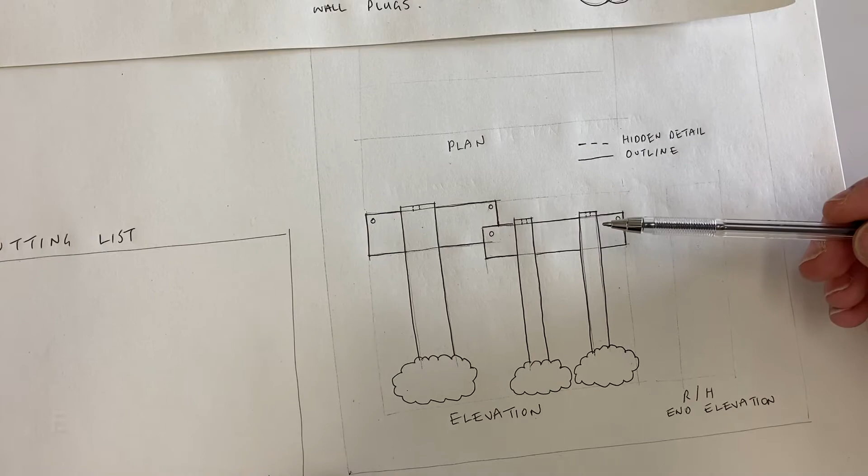You can see I've now finished sketching in my elevation. I've not added any dimensions yet, we'll do that at the end. But what I'm going to do now is I'm going to work on the plan view. So remember, the plan view is looking straight down the way from the top.

You can see that this piece of wood is thinner than this piece of wood, which is thicker. You can also see that I'll be looking at the holes on the top here, and I'll see just little skinny pieces or thin pieces of acrylic as I look from the top. That's going to be the trickiest part to do.

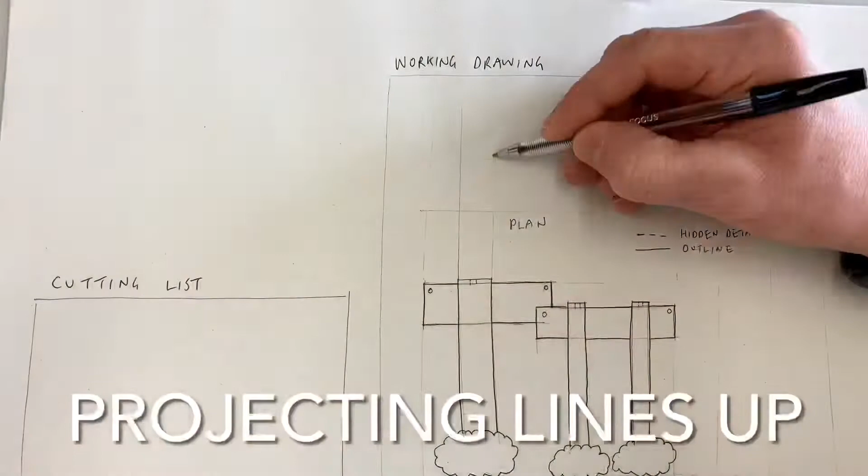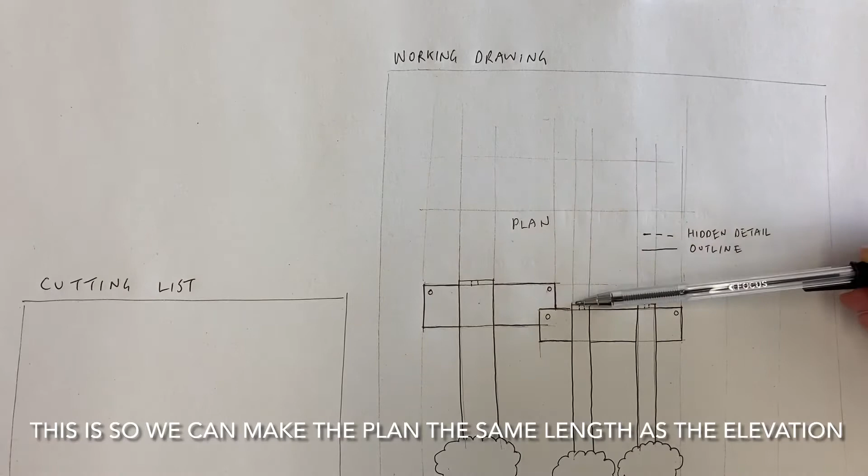You can see there that all I did was move from the left hand side to the right hand side of my elevation, and as I was doing that, when I came to any main feature, I have drawn a line up through where I want to put my plan, because I'm going to use these lines to help me arrange my plan to match up with the elevation below it.

The length of the plan should be exactly the same length as the elevation, and the width of each part on the elevation should be matched with the width on the plan. What I've done here is, using the width of my elevation, as I said before, I've now decided the proportion of how thick this piece of wood is compared to this one, and I have put that onto the plan view.

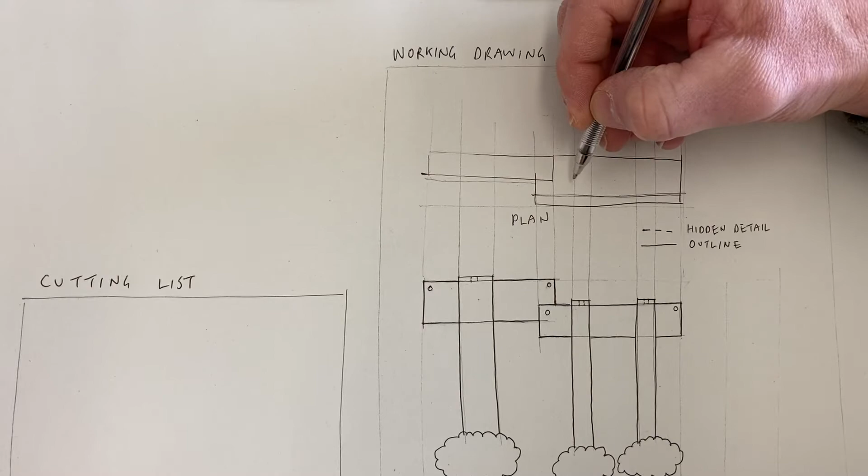I've also left a thin area here where the acrylic would fold over the front, and I need to divide that up now. These lines I'm doing at the moment are construction lines. They should really be a little bit lighter, but I want you to be able to see them. So I know that if I'm looking down from the top, these pieces of acrylic are the first thing I would get to compared to the wood. So what I do is I firm these in first.

There's the first piece of acrylic, and that stops when it gets to the back of the wood. Here's this piece here now, and this piece. The wood can now be firmed in.

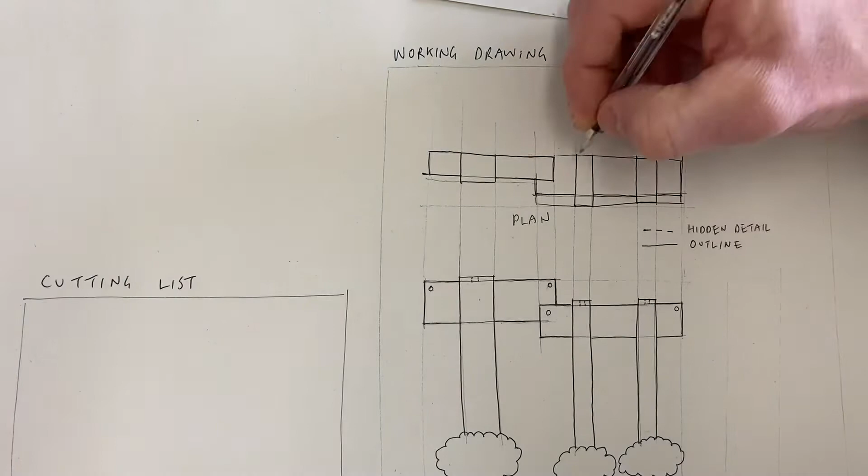Now, because I'm using pen here, this line here shouldn't actually be as dark as that. So that shouldn't be there. This is my outline here for my piece of wood. This is my outline here for the acrylic. This one's much better.

Now I'm going to put the holes in place where the screws would go through to hold the acrylic on. I want this to line up with the one over from it. Okay, so that's where the holes hold this piece of acrylic onto the piece of wood behind it.

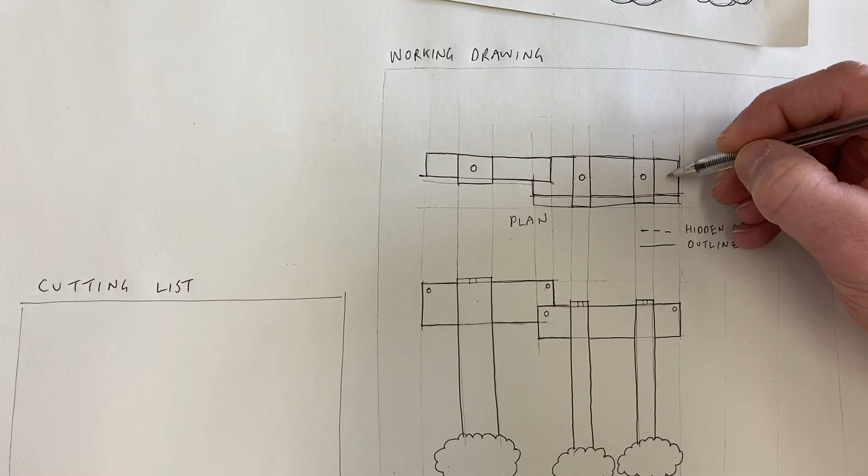Next, I'm going to do the clouds of water at the bottom of the waterfall, and also the trees at the top that grow around the waterfall tops. That should really be green, shouldn't it? I'll go back and do that later.

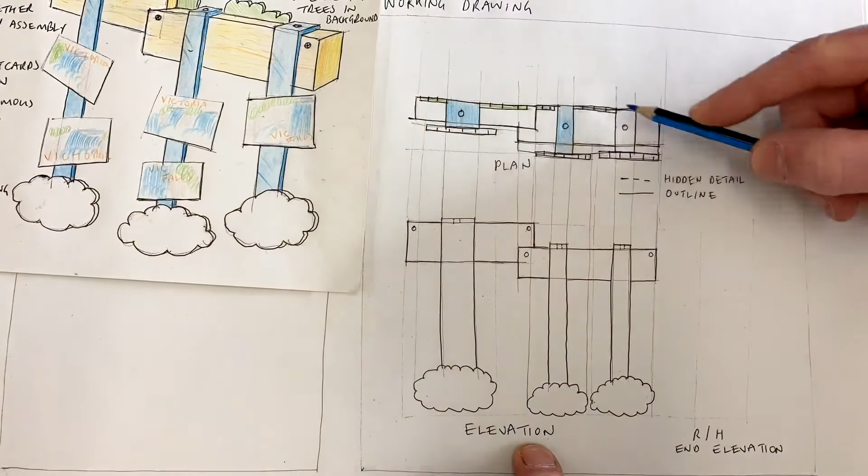So to help you understand, you can see that I've added some colour, just like the colours used in my design proposal. Looking down on top, I've got my plan view. I can see the holes where the screws would go through. I've got the top view of my wooden pieces. I've got the top view of the bushes or the trees at the top of the waterfall.

I've also got the top view of the thin piece of acrylic that would make up the foam at the bottom of the waterfall. And you can see here, I've got the area across the top of the water, and this is where it would fold over. So here, because I've got a line that passes underneath the acrylic, that has to be dashed because it's hidden detail. It's important that we show that hidden detail so people understand that that's a solid piece of wood that continues all the way through, and then this piece of wood continues all the way through these two pieces of acrylic.

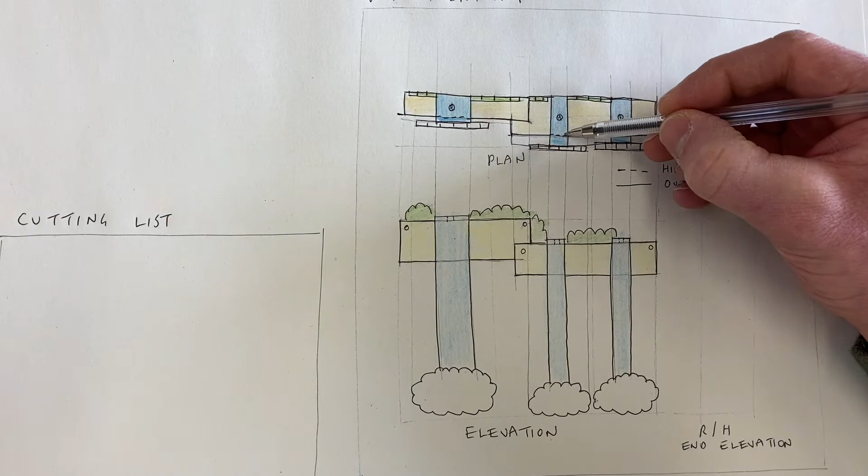If we don't show the hidden detail, it would mean to the reader of the drawing that this is one piece of wood, two pieces of wood, three pieces of wood, but actually it's just one piece of wood all the way across. I will now move over to the right hand side to do the end elevation.